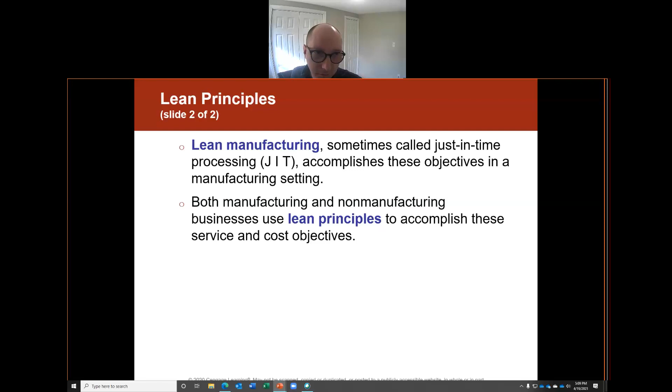When a company is lean, we reduce the inventory that we carry. What that means is my inventory is not just sitting on a shelf, not being utilized. I sell it quickly. I'm reducing what we call a lead time. A lead time is the time it takes to manufacture it, the entire time. Okay, and we'll talk about it in a little bit more detail.

Reduced setup times in the assembly process. Our employees are cross-trained. They're more involved. We have zero defects. We emphasize supply chain. These are all concepts of being lean. Being lean is different than traditional manufacturing.

So if you think about it from an automobile manufacturer perspective, Tesla uses lean manufacturing. Okay, they have the process down. There's very little waste. There's very little defects. Their employees are cross-trained, little setup time, little lead time, and they have low inventory, and they utilize supply chain.

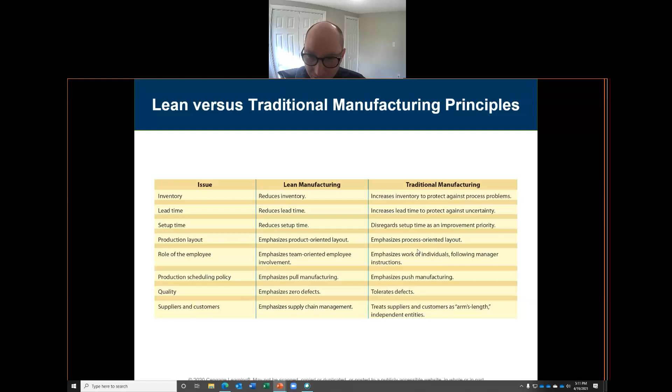Traditional manufacturer, an example in the same industry would be Chevrolet or General Motors. That automobile manufacturing company, they have a lot of inventory. There's some uncertainty. They have a lot of the same styles. There's a few defects, but they don't care. It's just a bulk manufacturer. And that's pretty typical. And so that's really the difference between a lean manufacturer and a traditional manufacturer.

So in lean, we reduce waste and try to make things more efficient. We identify problems and try to solve them. A traditional manufacturer, it's kind of the opposite. They have more waste. They have more issues.

When it comes to inventory, the lean manufacturer utilizes their inventory efficiently. What does that mean? Well, they don't have a lot of finished goods sitting on the shelf. Most of their inventory is tied up in raw materials and work in process. And in lean manufacturing, there's very little in terms of finished goods sitting on the shelf because they sell through.

It's a sell-through process. What that means is that they quickly sell their products just in time to be delivered to the customer. And so, from that perspective, there's not a whole lot sitting in finished goods. When it comes to a traditional manufacturer, they have a lot of finished goods sitting in inventory, and we see that it's very streamlined in terms of lean manufacturing.

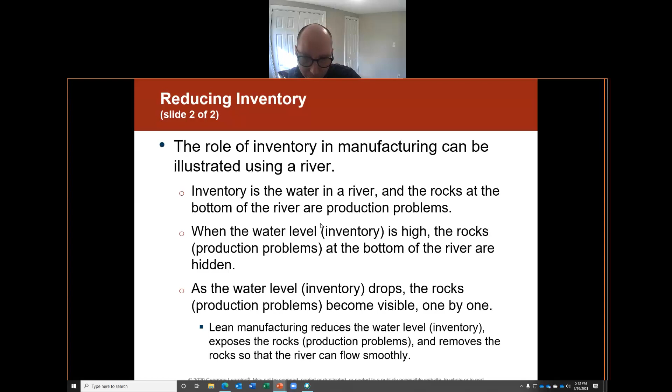There are two components of lead time. This part's very important, okay? There are two components of lead time. One is called value added lead time, and the other is called non-value added lead time. Value added lead time represents time that I am physically altering the product.

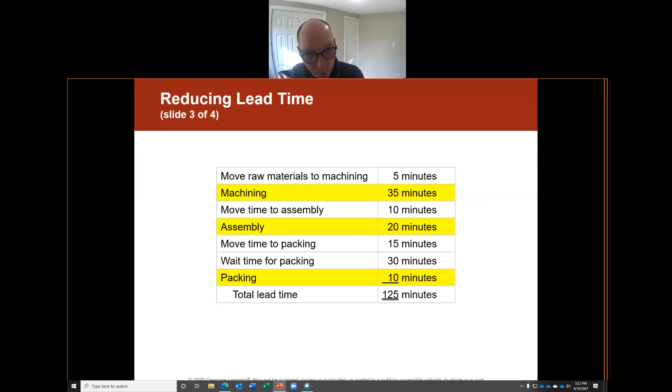I'm going to take my 65 minutes, and I'm going to divide that by 125 minutes to get 0.52. 0.52 is my ratio, also known as 52%. So I added my value added lead times together divided by the total lead time to get the 52%, 0.52.

We can see that a lower ratio means that we have a poor manufacturing process. In other words, we're wasting time. So 0.52 is okay, it's not great, but it's also not terrible. Terrible would be like 30%. That's really bad. 50%, it's not great, but it's also not terrible. 52% is okay. The higher the ratio, the better, right?

The idea behind this is that we want to have minimum non-value added lead time. We want to minimize that time where it's just sitting there or being transported because we're not adding value. The more we're adding value, the better, right? So that's the idea behind lead time. In lean manufacturing, we want to reduce our non-value added time. So that's the whole concept behind lead time.

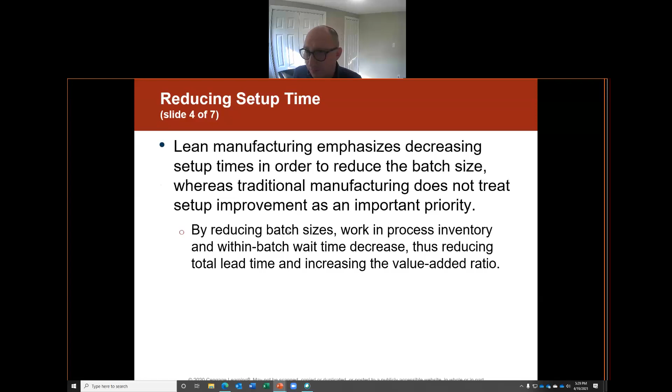Let's say a new example. We've got a new example. Automobile manufacturing. This company produces engine starters, which is a component to get the engine to start. Of course it is, right? All right, so this engine starting company, they produce engine starters. Here is their lead time. We got non-value added time, we got value added time, and we have a batch size.

Okay, so here's how it looks. My value added time, I got machining, assembling, and testing. That's value added time. So I got my calculator, 7 minutes plus 9 minutes plus 8 minutes equals 24 minutes of value added time. The total lead time, which includes the value added plus the non-value added time, is 49 minutes. You can also see I have 25 minutes of non-value added lead time. So 49 total lead time minutes, 24 minutes of that is value added lead time. And I have a batch size of 40.

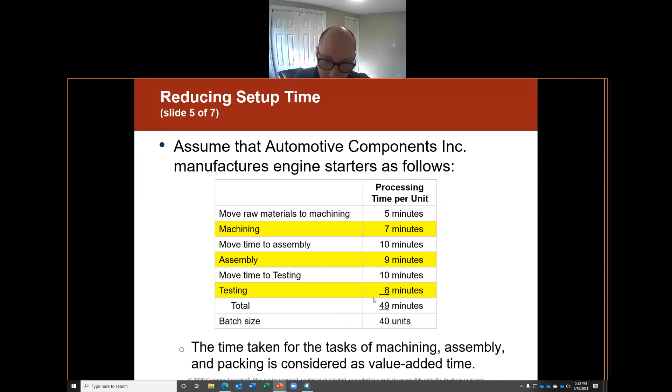So looking at my value added ratio, I have 24 minutes value added time divided by total lead time, 985 minutes. That gives me a ratio of 2.4%. That's not good. 2.4% is not good at all. That means it's very slow.

So what does all this tell us? This tells me a couple of things. We need to reduce our setup time. And the reason why we need to reduce our setup time is because we have too much non-value added lead time. And what happens when we have too much of that is we have accumulated inventory. And that's also not good.

So what needs to happen here is we need to reduce our setups. That will reduce our batch size. We need to move our streamlined activities closer to reduce overall transportation time. So, in other words, in my assembly line, if I move machining, assembling, and testing physically closer together, it will reduce my total lead time.

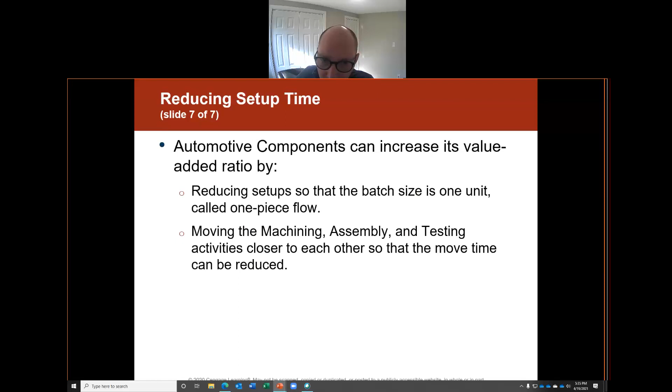Which leads us into the next topic called product-oriented layout. Think of like a physical space, okay? Think of like an assembly line. You have your raw materials over here in the yard. Then you have your work in process departments. We have drilling, assembling, testing, blah, blah, blah, packaging, and then it becomes a finished good. Think about that physical flow as the product moves through the process.

The idea behind it is we want to be efficient to reduce lead time, to reduce inventory, to reduce. You got one. Yeah, I'm getting to you.

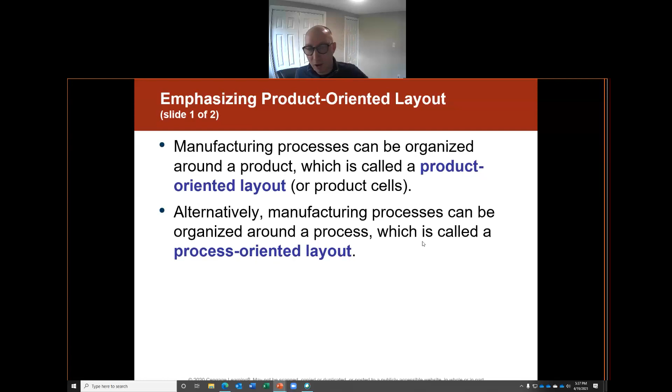One way we can reduce all these things is to be efficient in our product-oriented layout. It's how we organize our manufacturing process around the product. It's like the physical flow, right? It's a way of shortening the time in between different departments and different stages in the working process. And you can do the same thing in a service business through a process we call process-oriented layout. It's just how the physical structure is flowed.

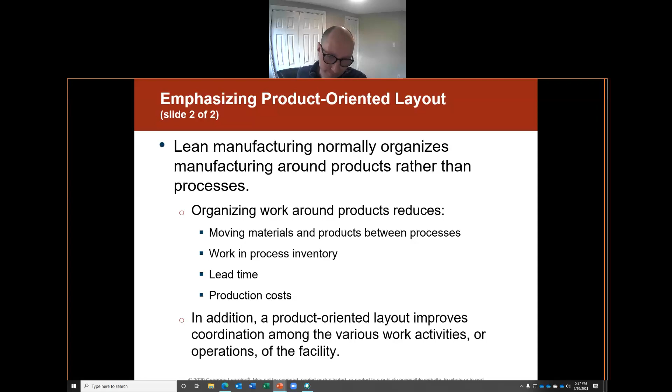And what happens when we do this? We reduce the time of moving materials between processes. We reduce the work in process inventory. We reduce our lead time. We reduce our production cost. All of those things in conjunction lead to a more lean manufacturing business. Remember, we're talking about lean manufacturing throughout this whole chapter. We're trying to reduce our inefficiencies, reduce our inventory, reduce our costs. That's what the word lean means, yeah? To be efficient.

In most lean manufacturing businesses, we involve our employees in a couple of different ways. We involve our employees in decision making. We cross-train our employees to get them to be more efficient. Having cross-trained employees is very beneficial because I can use employees in different areas within the business, right?

When I was in the hotel business, I don't think I told you guys this story. So you all know that I was a hotel guy. I came from the hotel world before I got into teaching. I was a financial controller for the second largest hotel in New York State. In that business, I was primarily responsible for the accounting operations, of course. In addition to that, I was cross-trained in a lot of different areas.

I knew how the front desk ran, so I worked a couple of night audit shifts. I knew how the bell stand worked, so I was a bellman. I knew how to tend bar. I was also a bartender. I knew how to wait tables. I knew how to work in banquets and set up banquets for weddings. A lot of different areas I was trained in. Okay, what that did for the hotel is they were able to utilize me during my downtime in other areas, making the hotel more efficient.

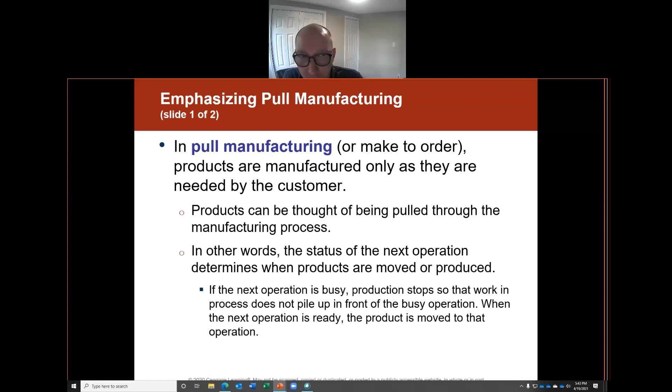In manufacturing, an example would be Tesla, an example would be Toyota, an example would be other companies that make it to order. They don't have it in inventory. They have to go make it. Okay. That's called pull manufacturing. They pull it through the manufacturing process. And it's, of course, very streamlined because they don't have to pay for inventory sitting, waiting to be sold. There's a lot less waste involved. That's why pull manufacturing is very popular. It reduces a lot of those costs.

A lot of other businesses use this concept called push manufacturing. Push manufacturing means they push it through the process and they build inventory waiting for it to be sold. An example of that would be General Motors, Ford, pretty much any other manufacturer where you see a stockpile of inventory. They use push manufacturing. They push it through the process and wait for it to be sold. That is not very efficient because there's a lot of cost associated with letting things sit in inventory, waiting to be sold.

The idea behind lean manufacturing is we try to be as efficient as possible. We want to reduce scrap, rework. Oh, rework is the worst. It's like, oh, I screwed it up the first time. I got to go do it again. Oh, that's the worst. Oh, you forgot to measure twice, and you only measured once, and then you made the cut to the wood. And all of a sudden, you have a missized door. I've been there. I've done that. Measure twice, cut once. Avoid rework.

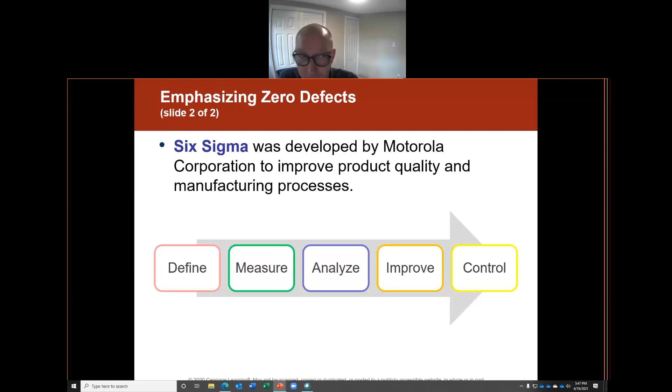Along the lines of lean manufacturing, which, as you know, the objectives of lean manufacturing are to reduce cost, reduce waste, reduce lead time, and to be more efficient. Efficiency is a major part of supply chain management.

Oh, supply chain management. You probably heard this concept a little bit more in the past 12 months than you probably ever have before. Supply chain. Supply chain is the idea of coordinating and controlling the flow of material, services, information, finances with suppliers, manufacturers, and customers. Supply chain.

Right now, the United States has a serious supply chain management issue. We have for the past 50 years, but it's gotten substantially worse in the light of the pandemic. What has happened? The majority of computer chips are made overseas. Okay, they're typically in China and other areas around the Indo-Pacific region.

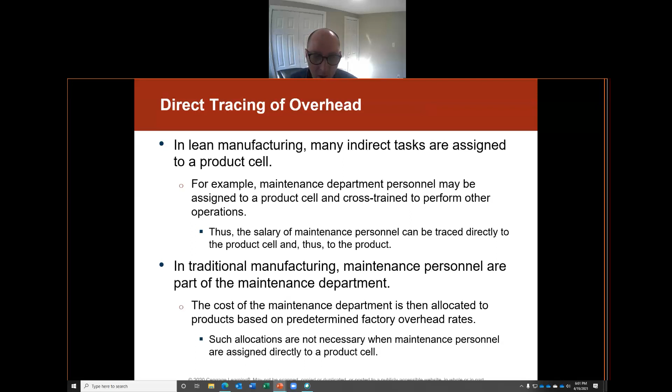Tracing overhead is another way for businesses to be more lean in their manufacturing process. Salaries of maintenance personnel, salaries of production supervisors, indirect materials, things that we can trace directly to the manufacturing process. The more factory overhead we can trace, the more efficient the company's being in allocating costs, and thus the overall cost is reduced.

And another way to have a lean manufacturing business is to analyze your activities by looking at quality, value-added activities, and processes.

In terms of cost, as you know, it is one of the biggest driving factors behind business and their efficiencies. The idea behind lean manufacturing is to reduce costs. In doing so, we incur this thing called cost of quality. The way I want you to think about cost of quality is when you think about the cost of a product, we look at products in terms of quality. Okay, quality meaning high quality versus low quality. We know that things that are typically low quality usually have a low cost associated with them. Things that are of high quality typically have a high cost associated with them.

In order to minimize the cost of quality, we look at costs that can be prevented. An example of that would be costs associated with engineering, with quality control inspections, vendor quality, training our employees, maintaining our equipment. We call these prevention costs. A prevention cost helps us to prevent additional cost to the product. It helps us to prevent defects. It helps us to prevent inefficiencies. That's why we call them prevention costs.

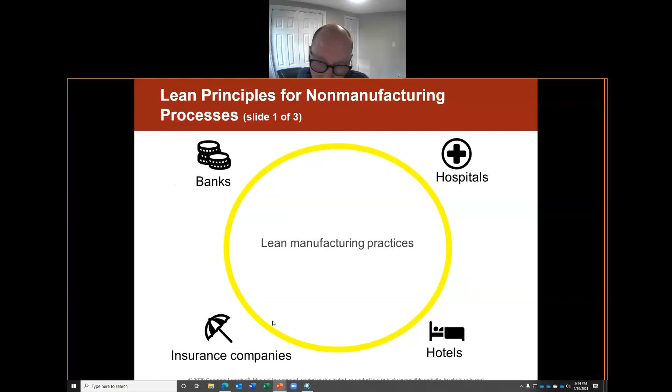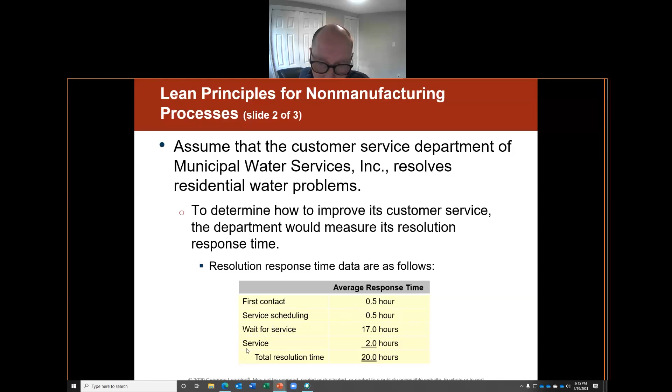Now, what about non-manufacturing businesses like banks, hospitals, hotels, insurance companies? We can apply the same principles in terms of time measurement when it comes to value added and non-value added. And this is just an example of that. First contact with a customer, scheduling time, wait time for service, the actual service. We can see that through that analysis, we can look at value added versus non-value added from a non-manufacturing perspective. Do the same thing in a hotel business.

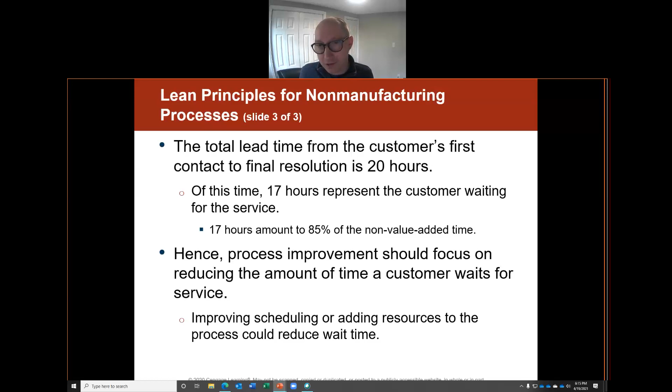So if you look at the amount of time it takes from the time that you first have contact with the guest up until the time the guest leaves the property, when they receive their bill. From that time lapse, you can actually go value added, non-value added with each point of contact with that guest to identify the efficiency of the time being used when we're talking with the guest. So just an interesting concept. And that, my friends, is the end of lean manufacturing.